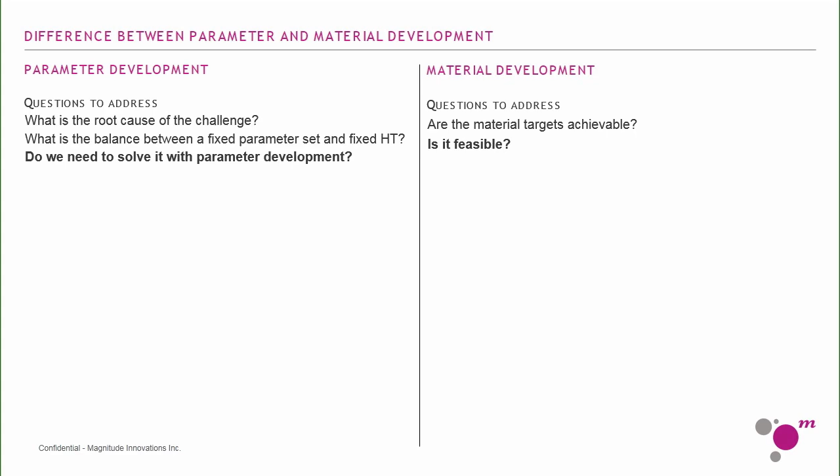On the parameter development side, we make a couple assumptions: that we have a fixed powder in terms of chemistry, particle size distribution, and morphology. We have fixed machine settings, typically the values the machine manufacturer sets up, and we don't mess around with, for example, the laser type. But there are also some things we can optimize and tweak within those confines to get better material properties, or at least make sure the material development work is successful. In terms of parameter development though, we leave all that constant. To some extent we also leave the layer thickness constant, because generally, when you increase the layer thickness, your parameter window actually narrows. So if you're building something in a 30 micron process and then you go to a 90 micron process, you're going to have a much harder time finding a parameter window that's good for your application and across all the other applications you'll develop.

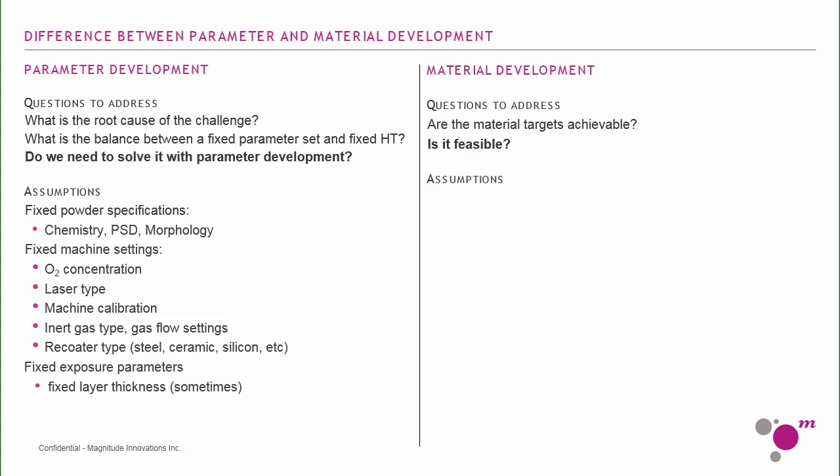On the material development side, we need to fulfill aerospace requirements, and that's our first and foremost focus. That means qualification and characterization of the material across the powder bed, in the Z direction, across multiple machines, and across powder batches — that takes priority.

Rather than just going, we're going to tweak this value, it looks better, everything is fine, we have to make sure that little tweak actually means it's still fine in terms of everything else we're doing. And the additional challenge we have in that area is the fact that we need to have a lot more process knowledge.

We need to have a lot more of an understanding of how every subsystem of the machine is functioning. And then we have to ensure that all of the variables that are actually in the system, which the OEM, for example, the machine manufacturer, would verify for the parameters that they release, it's going to be good for what we're doing.

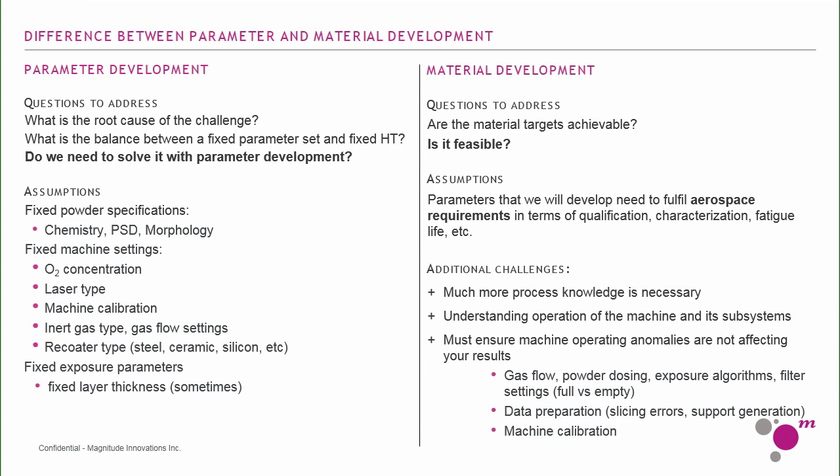What we do on the parameter development side, or material development, is we first create a customer URS. This is a little bit difficult, I think, for some people because they want to just see what they can get out of the system. But at a certain point, you've got to have a system where you're going to say, this is good, this is not good. We're either going to continue or we're going to reject this whole process.

And that's why you create the URS with everything that you specify. Of course, this can be modified later on, but you need to have some targets so that you can create a budget and understand this. Because as you'll see in a second, the budget can explode.

The next thing that we really need to think about is validation versus verification. So what we mean by that is, I'm going to give a little example. Imagine that you have a stove, just a very simple application. You turn on the heat and you want to understand what temperature whatever you're making is going to get to.

So you do a basic simple test where you set the stove at 1 and then you measure the temperature, then you set it at 2, you measure the temperature, and you keep going, and you find some kind of correlation, and you go, okay, this is how this system behaves. So that's the validation step.

Then the verification is when you're actually doing your work, you're trying to understand, is it still behaving within those confines? Now, you can't realistically do validation of every process parameter on the machine on a regular basis, because that would take you 3, 4, 5 days.

So what we do is we do a verification step where we'll, for example, in this case, say, okay, at 100 degrees Celsius, the water is going to start boiling. So let's take a pot of water, let's put it on the stove, and let's see, is it actually fulfilling that requirement? Yes, it is.

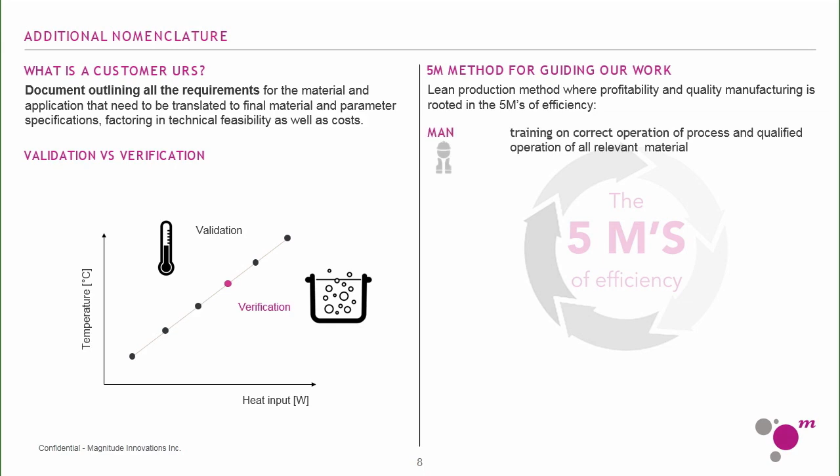So what we do is we call it the 5 M's of efficiency. It comes from lean production, and it's 5 basic steps. There's the man side, machine, materials, medium, and methods.

All of those are extremely important, because you have to make sure that your people are trained well and that they're doing things in a repeatable way. You have to make sure that the machine is doing things in a repeatable way, that the materials you're getting in are good.

And this is something that we take for granted sometimes, that the environmental conditions are good, and that the procedures that we have internally are followed to the dot every single time that we're doing our work. And that has to be documented, because there is unfortunately a lot of variability in the AM process that is operator caused, that is supplier based, supplier dependent, and we have to make sure that whatever it is, it's the same.

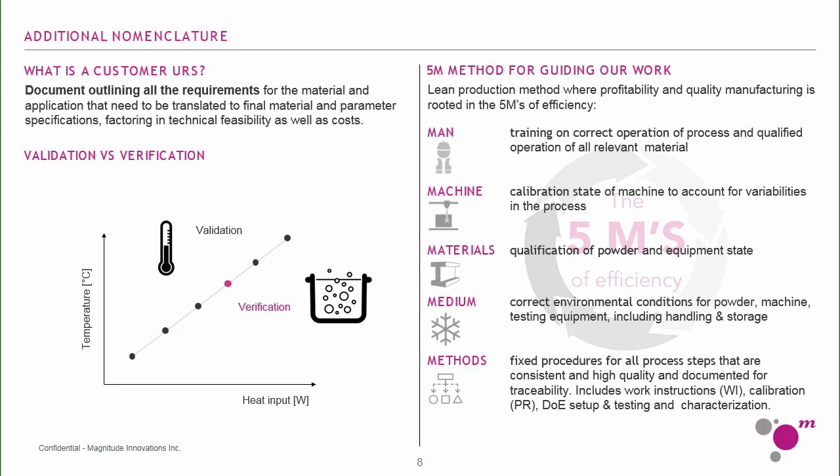So then after we do the development work, we go through the qualification and the validation, or before, sorry. So what is qualification? We divide the qualification into 4 separate steps: FQ, IQ, OQ, PQ.

The reason why we do this is because we want to make sure that everything that's going to stay constant will be checked before, and then everything that we're developing is going to be done afterwards, in what we call the PQ.

The factory qualification is something that you do basically at the OEM that's delivering the machine. Then the IQ, OQ, PQ is something that you do on site. The FQ, IQ is pretty much the same - you just want to make sure that the machine, when you push a button, it does something, and it does it in the same way every time, that the button works.

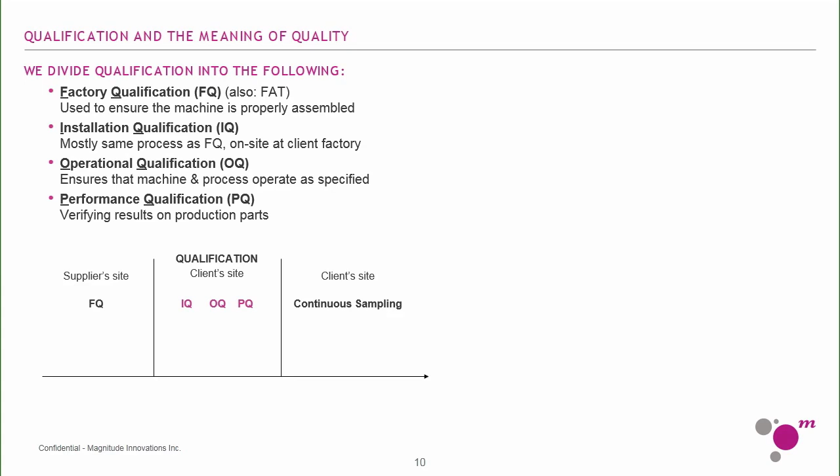The OQ is when you push the button, you want to make sure that it gives you exactly the same value, so that's the validation aspect of it. And then the PQ is the aspect where you're actually testing whatever you want to understand, whether it be a material or an application, and you go through the process of making sure everything is correct on the final results of the final application or part you're working on.

And then as you're going into production or doing your R&D, you do some verification, which in this case I gave the example of continuous sampling. And the last thing that's really important is the quality in aerospace.

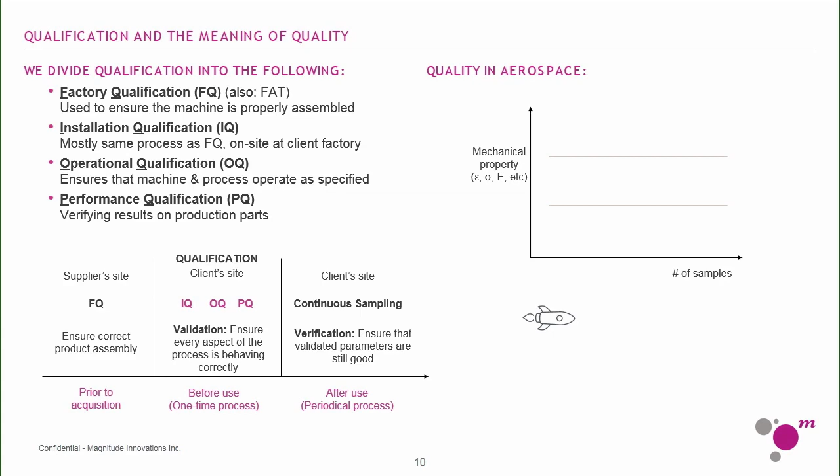When we talk about quality, we tend to say there's a good, a better, and a best. Well, in aerospace it works a little differently. When you have some kind of standard deviation of mechanical properties, as you can see in those gray markers, anything below that is bad, anything within that range is good, and anything above that is also bad. The reason is that even though it's better, we don't understand why it's better, so it's not within our standard deviation, which means it's a surprise to us. And that's what quality means in aerospace.

So this is the funny example of how a lot of times aerospace customers will have a piece of software that comes from 1984, and you're going, why is this? Well, because it worked, it's always worked, and we don't have to revalidate it.

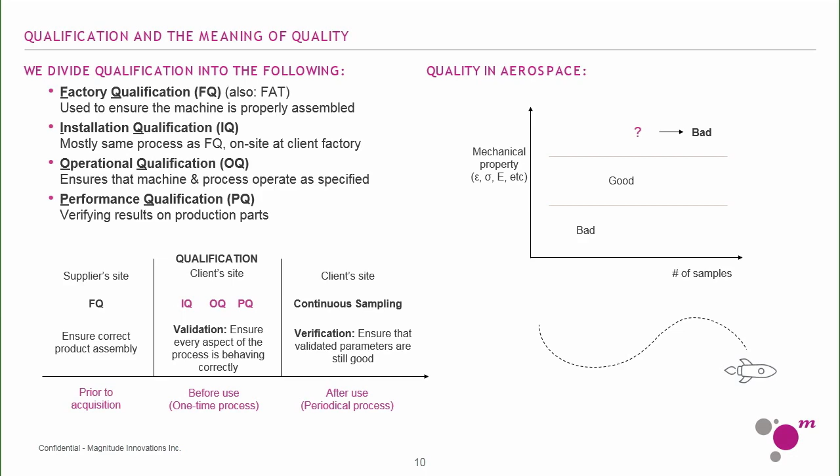One example that's really nice to give is in terms of powder validation. When we're doing powder validation, we want to understand how the powder behaves in terms of sensitivity with respect to the process. So if you turn a knob 5%, you want your results to change by 5%. If you turn the knob 5% and your results change by 10%, then the sensitivity is twice as high, which means the process can be unstable with regards to that knob, so we should probably freeze that knob.

The next thing is that we want to break it down into the machine properties, the powder properties, and the position in the build that you're making, so all of these things have to be documented, and then of course the powder evolution, which is the powder aging that we normally talk about. After you do those first three, then we can actually get into the topic of powder evolution.

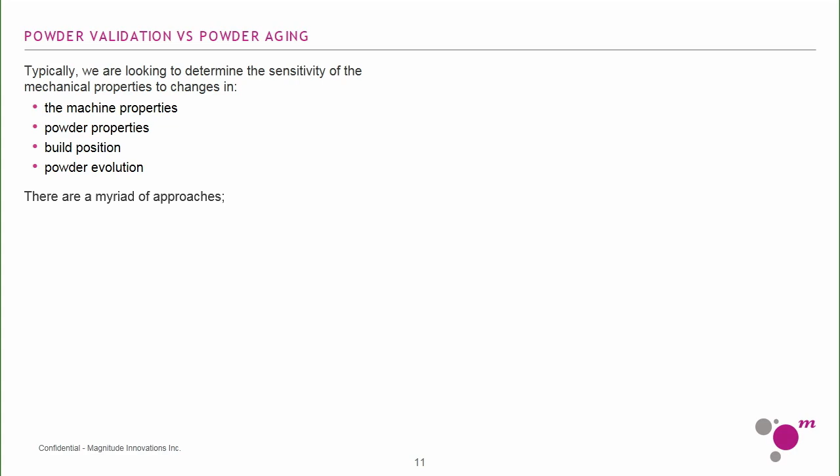There's a number of approaches to doing this. The typical approach is actually doing a test on 3 machines and 3 powder batches. Now, it's really important to understand that the machine variability is typically significantly higher than any powder variability you have. That's not to say the powder has no variability, but when you change your powder, it typically means the variability of the machine increases, not the other way around, because remember the powder is actually something you can't really change.

So in a hypothetical, this is how we would actually test it. We would have 40 tensile bars per build, density cubes in order to measure the porosity, powder samples in order to measure the powder properties, and then you need a certain amount of powder.

Based on that, we could have a breakdown of different configurations: different powder batches, different machines. So if we do the first simple test, which is 1 powder batch, which is realistically what customers usually do, we would test it on 3 machines. It would cost around $20,000, and we'd have around 120 samples.

The sample quantity is actually quite important because when you're characterizing a material, there are certain requirements in aerospace for how many samples you need to test. Through this way, we can understand the machine variability and the powder aging. Now, the machine variability, like I mentioned, is the most important thing, so this is probably, coincidentally, the cheapest and also one of the best ways of doing this.

When you increase the number of powders because you only have 1 machine, the costs automatically go up, and the cost per sample goes up, which is important because you need a lot of samples in the end. But what we do get to do is understand the powder variability. Then the other variant is where we actually test 3 powder batches and 3 machines. Of course we could do 9 different runs, but it's going to be quite expensive, so in this category we'll have about $40,000 worth of costs.

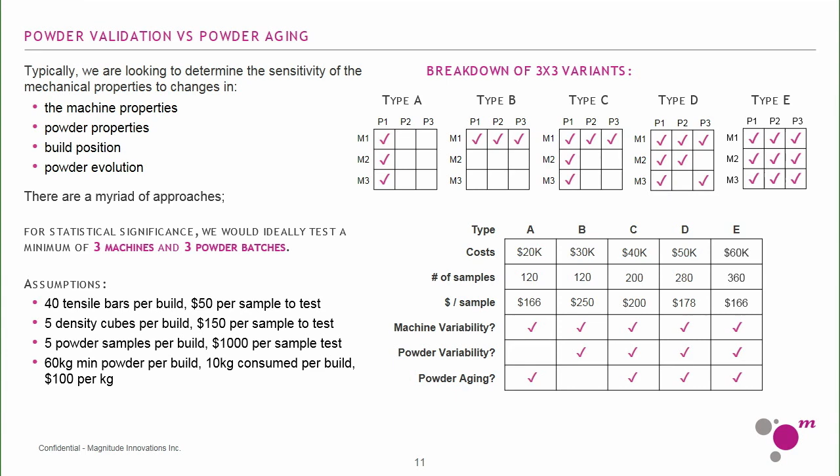So this gets really, really expensive very quickly, and that's the materials development. So the other aspect that I wanted to point out is the production quality management system. This is a typical production flow in an aerospace production. The difference between aerospace and aeronautical being that aerospace are things that we put on satellites and aeronautical are things that we typically think of, like a Boeing or a commercial application.

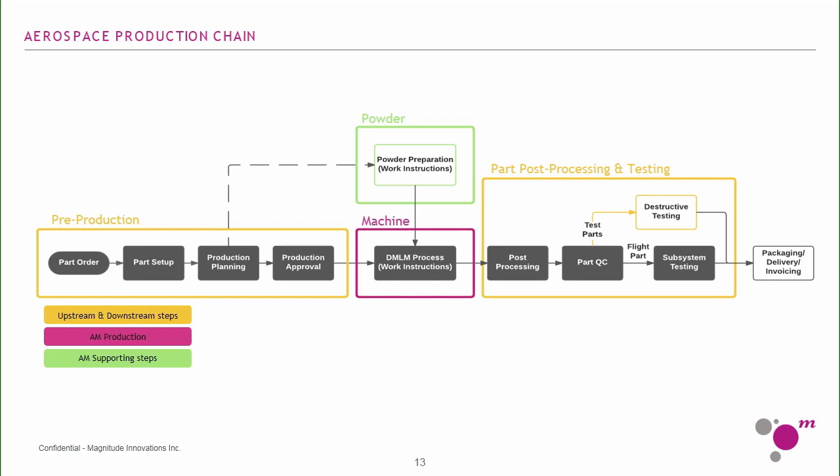On the aerospace side, we have a more black box approach. The reason for that is we don't have that many parts that we're building. When we're making a satellite, it's going to cost $500 million and there's going to be 4 pieces, for example. So you don't want to have to do a whole fatigue validation, machine characterization, powder evolution. That's not really necessary because we're not going to have that many parts. So we actually test a lot more parts in a destructive way. And then we actually have the flight-ready parts that go onto the satellite.

On the aeronautical side, the complexity actually blows up, and it increases on every aspect of the process. So the machine, the powder, the pre-production, which is the data preparation, also the post-production, the post-processing, and all of those things, if you think that they're stable, think again. Every one of those things has insane variability, and people are starting to learn that now, slowly.

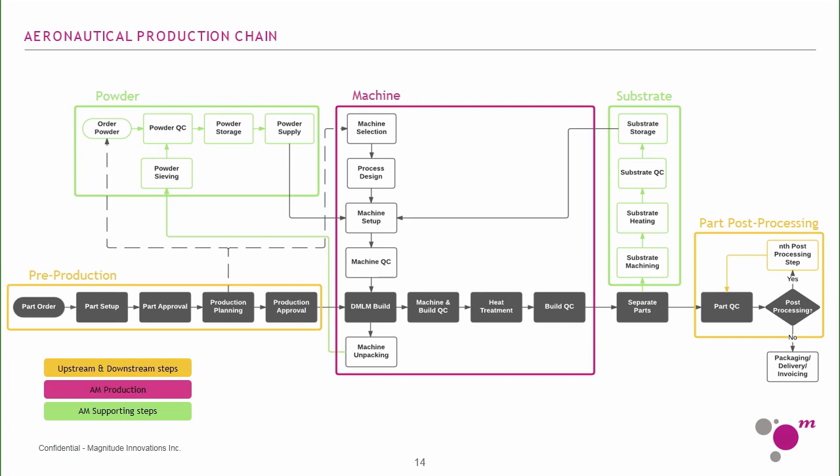But it's very important to document these things and to keep in mind every part of this process actually has at least one document behind it. So these documents are really extensive, and that's part of the quality management system.

So on the aerospace production side, like I mentioned, it's a small batch of parts. On the aeronautical production, it's a huge batch of parts, and the aerospace topics are usually treated like a black box approach. The aeronautical topics are actually dissected into every little aspect of the process as much as we can, and there's a document to record it and back it up. This obviously takes a lot of time and resources, and it's something you have to do way before you commit to actually doing any kind of production on the aeronautical side.

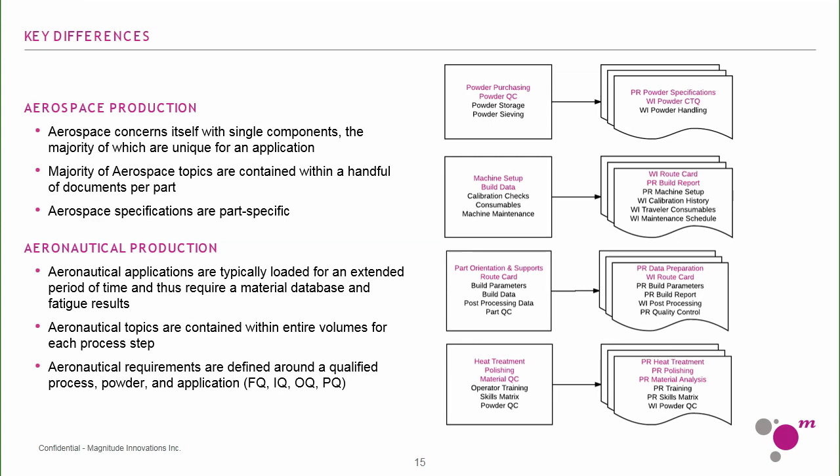So this is also important for the material and parameter development. When we talk about parameter development, we like to look at it as a process. This process does change from one alloy to another, from one machine to another. So I'm going to try to give you a machine agnostic approach to this, and it looks like this.

So what we do is we create the user requirement specification. We then pick whatever alloy we're going to use. We then create a specification for it. We do a feasibility study. This is where half the people are already lost, and they go, this is possible, maybe not, but they don't really know what variable is affecting the results. So they don't know really where to go in terms of improving their parameters or whether they should just drop the whole thing.

So afterwards is when we actually make the decision, and we have a milestone there, a very firm milestone: do we continue with the development or do we drop it? Because in reality, after the feasibility study, you're probably 80% of the way there, and you try to make the decision on whether we should validate the process, because there's not a lot of room for tweaking the parameters anymore. So when I'm going to be talking about parameter development, I'm actually only talking about the gray areas. The stuff in pink is just to give you an idea. It kind of looks like this.

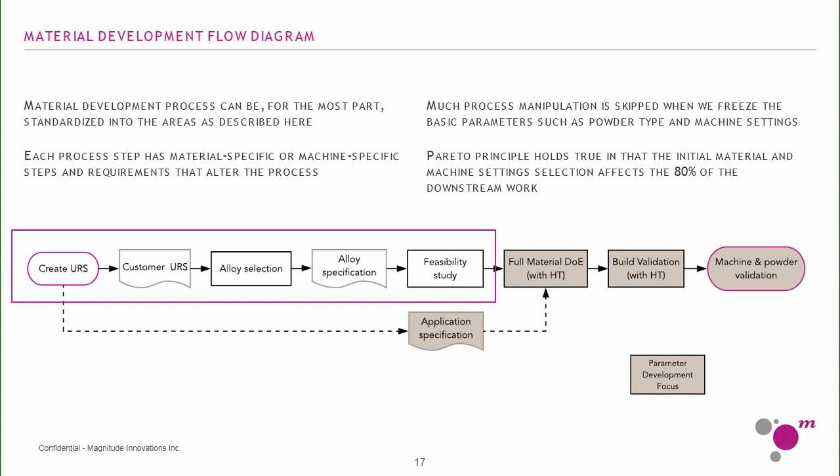So we create a user requirement specification. We create a document that's behind that.

We then take a look at whether the alloy we're making is going to be possible by looking into the literature as well as the internal database the customer will have, to understand whether any additives will change the grain structure, whether they will reduce or increase the porosity or cracks in the parts, or the roughness. It gets pretty complicated, so it's very nice to have a database. We provide help with that. It's a collaborative effort—you can't really keep that to yourself. Machine manufacturers have that data as well because they do parameter development.

Then we actually take a look at a powder supplier. If we find a good powder supplier, we'll go ahead and do the development. But that's when we actually start doing the feasibility study, which we divide into three separate areas: are there cracks in the parts—which is already a difficult question to ask; does the density meet the user requirement specification; and do the static properties meet the user requirement specification?

The reason this is important and very significant for anybody trying to do this is because when we measure porosity, we need to understand it in terms of size and distribution. Right now there's no standard for measuring porosity in any industry, so what we do is create our own internal standards that we calibrate to. Those are important because changing the polishing you do on a sample, the etching, or the imaging changes your results significantly—over 50%. When you have that variability, it's a garbage in, garbage out conversation.

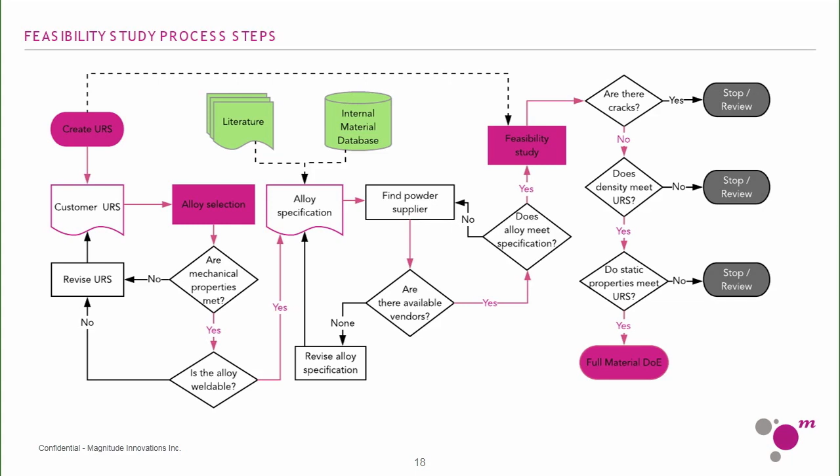You're not going to get any good results you can draw conclusions from. Then finally, after these things are good, we do the full material design of experiments, and it gets very machine specific, alloy specific in terms of what we're going to do. After giving you that context, which took a good chunk of my time—I think that's the most important thing—when you do parameter development, that's when you sit down at the machine and change laser power, laser speed, where the laser hits the powder bed, the layer thickness. Only at this point is it possible to do that in a good and repeatable way.

So what we had is an application which is a hydraulic manifold. I can't talk about the final end user, but we did this with Spartacus 3D, where the application fits in a 250 by 250 build area. The first resistance we had was that titanium cracks—it's not possible to build something this big. Well, I think it is, so we went ahead and did this.

Of course, you need better powder control in terms of the oxides. You need to manage your residual stresses better. You need to understand how the process affects your fatigue results, which is the most expensive part of this whole thing in terms of validation. And you need to make sure the post-processing is minimized.

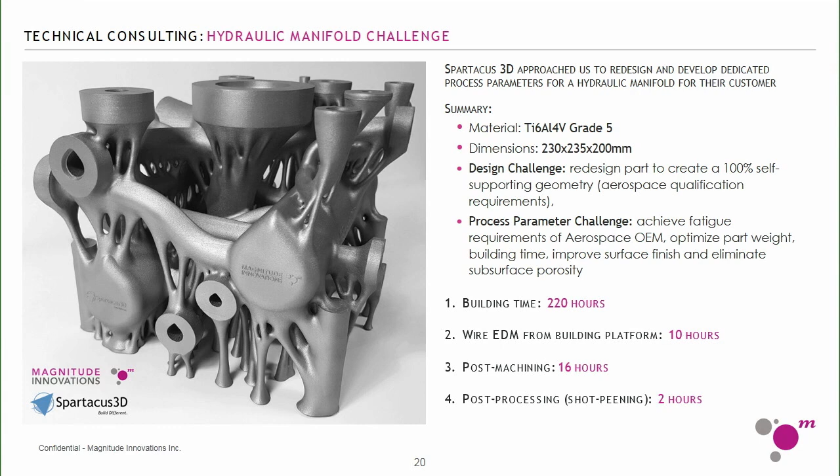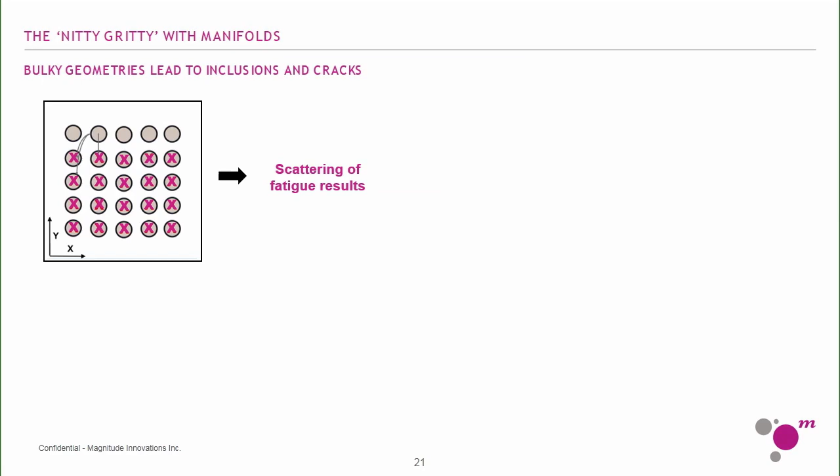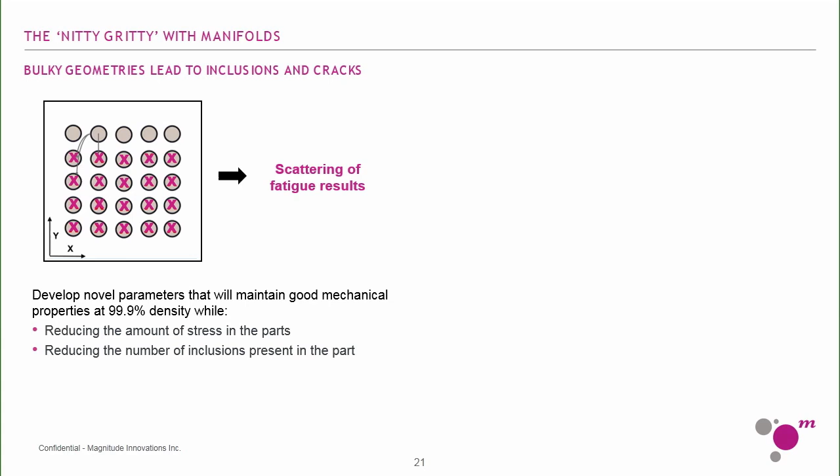The first thing we did was look at the impact of this massive geometry on the mechanical properties. When you have a lot of area exposed per layer, the statistical defects actually increase in the process, and that has a direct impact on fatigue. But you're not going to be testing that every time you run a build, because that means every iteration takes about 4 months. So we first tried to understand the scattering of these results without having to build the whole manifold, reduce the residual stress in the application, and reduce the number of inclusions in the parts.

And volume jumps on the surface are no big deal because of the fact that we can post-machine those geometries. But when we have something like a hydraulic manifold, you can't machine the insides. And the answer isn't easy in the sense of we're just going to do extrude hone or some kind of polishing, because you still have to verify all those surfaces. So what we do is we try to actually focus on smoothing out those peaks by doing some clever exposure strategies.

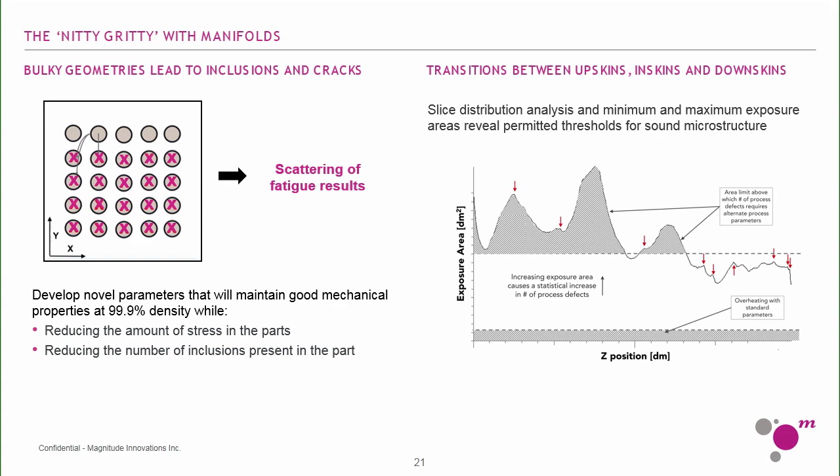The next thing that we look at is, after defining the entire volume of the part, we take a look at the surfaces. Now, in a typical laser powder bed fusion process, when you take a look at downskin areas, you have completely different parameters from the vertical walls and the upper facing walls. And those kinds of parameters lead to these kinds of defects. These kinds of defects are actually subsurface porosity that occurs in the process because of the fact that the layer is just at too steep of an angle.

Now, Velo3D, for example, has a solution where they're building with 5-degree angles. The laser powder bed fusion area is focused right now on building something between 15 and 20 degrees. But when we talk about the angle, we have to talk about, is it possible to build? In other words, will the machine just crash? And then the other aspect we have to talk about, is it actually going to meet our mechanical properties? And in the case of the mechanical properties, 15 degrees is not really doable because you have these kinds of effects. So what we did is we redesigned the parameters so that we can remove this subsurface porosity.

And at the same time, we focused on making sure that the roughness in the geometries on the downwards facing areas, upwards facing areas is actually more homogeneous. Because when it's homogeneous, then the post-processing costs actually go down. So we defined these critical to quality regions. And we went through the designers over, I think, like 10 different iterations in order to improve the internal channels, to minimize those angles, to make the area self-supporting.

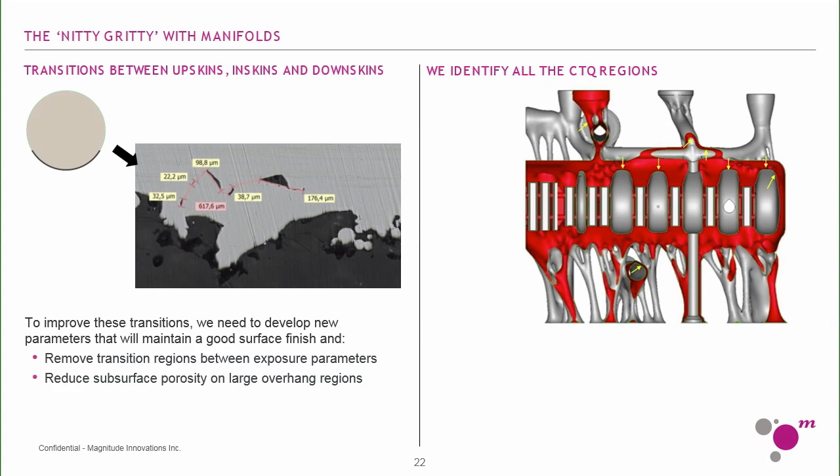So even though here you can see that there's a horizontal structure, orthogonally speaking, when you take a look at it from a 90-degree perspective, it's self-supporting. And where it wasn't self-supporting, we had to keep in mind that we have to make it machinable. So then, after we did the parameter development, this is what we got. You can actually see that the transition between these downwards facing areas and the upwards facing areas is very homogeneous, and this is straight out of the machine. And then we also, of course, tested those regions to make sure that the porosity is good, and it was. I didn't expect this, to be honest.

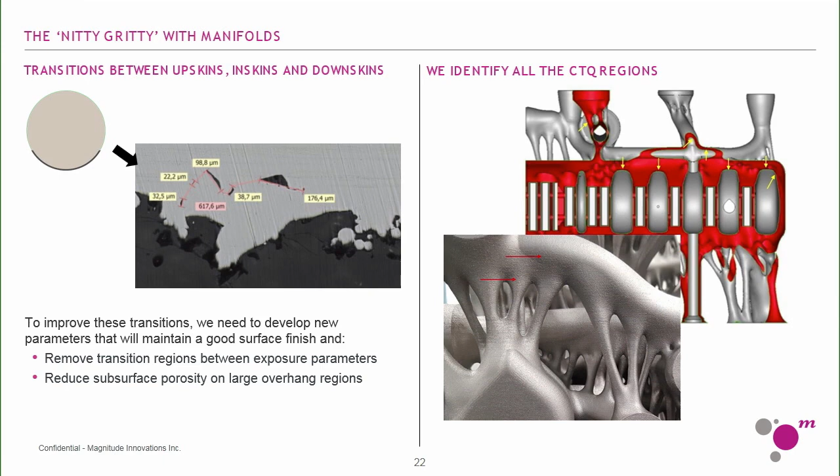So just to conclude, the areas of application that we look at in terms of parameter development are, I think, different from what customers typically expect. And what we try to focus on is actually application-specific parameters. However, those parameters have to be validated, keep in mind, and that's quite expensive. The second thing is that when we work with organizations, we notice that the largest deficit is actually in their quality management system and their process knowledge. And the process knowledge is something that you can outsource or you can keep internally, and I would say you should do both by building, for example, a very robust FMEA.

However, we have to accept the fact that any person working on the operational side will probably be there for 2-3 years, and then they're going to want to move on with their lives. That's the generation that we're in right now. I'm a millennial as well. And so we have to make sure that the system is redundant for those things, because we can't just have this knowledge uptake and loss all the time on a regular basis.

And then when it comes to the business case, I think you need to take a look at all these aspects before you commit to developing a project, because otherwise you're selling yourself short, you're disappointing your customers, and you're not really sure where you should invest your money in terms of the future growth of your company.